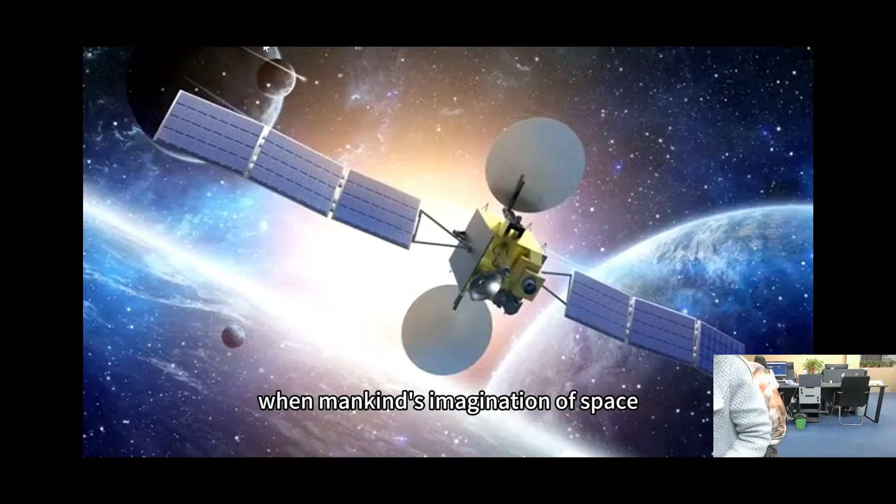When mankind's imagination of space breaks through the boundaries, when buildings are no longer bound by traditional structures, how to use the skeleton of steel to hold up the freedom up to 100 meters. From industrial factories to stadiums, from transportation hubs to cultural landmarks, LF has been deeply engaged in the field of steel structure and mesh frame for 30 years.

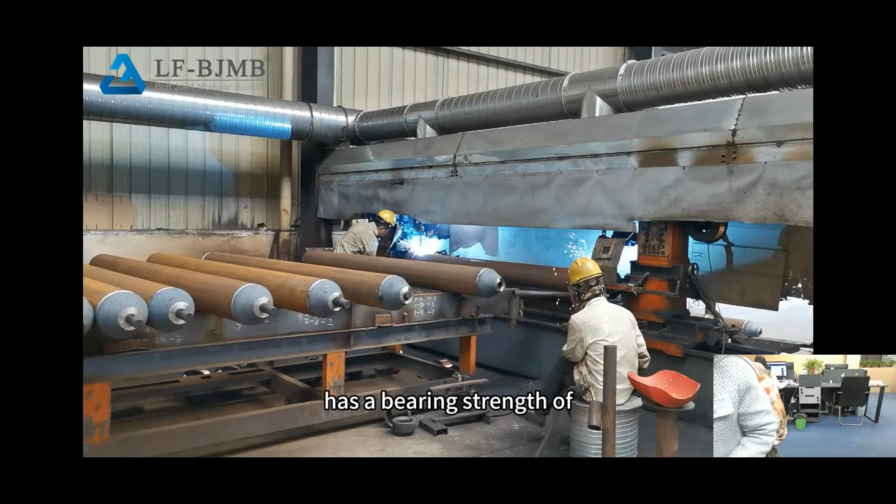We believe that true architectural innovation begins with thinking about the nature of space, removing redundant columns, and restructuring the balance of force and beauty with precise calculations. Each design proposal is a redefinition of extreme span. The self-developed LBX node system has a bearing strength of 1.8 times that of the traditional process, and the BIM full life cycle management system controls the material loss within 4.2%.

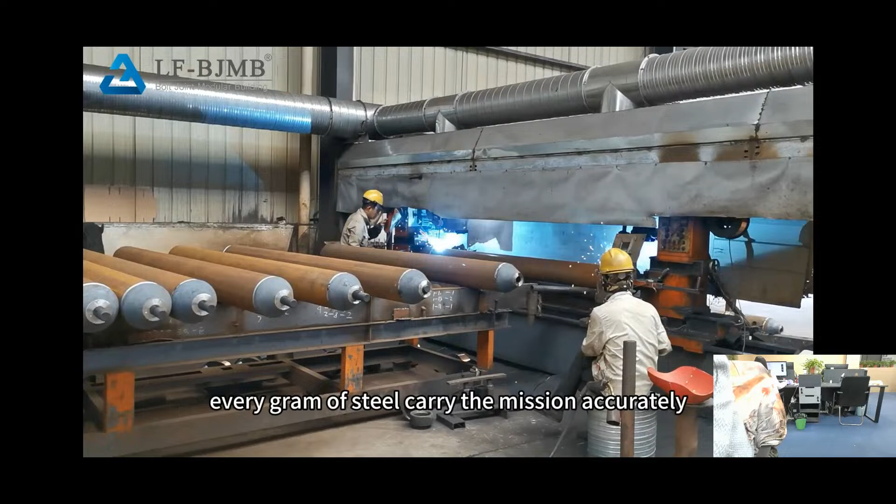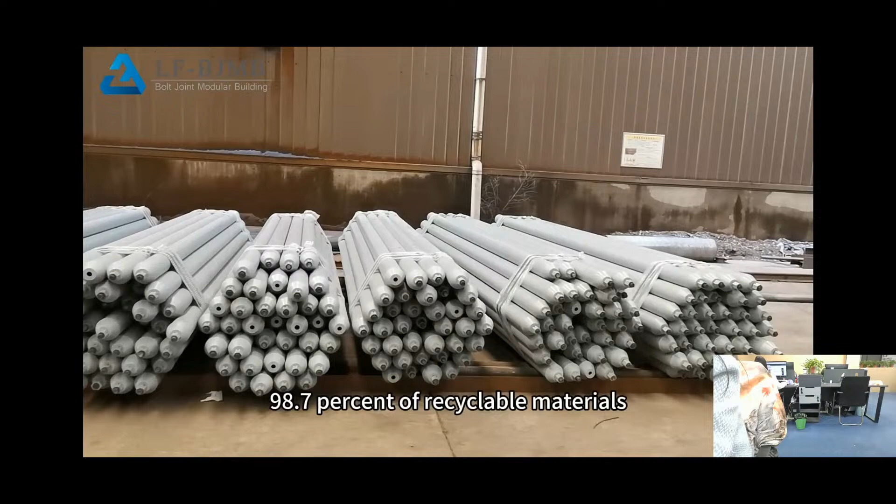This is not only cold parameters, but also our dedication to lean construction to make every gram of steel carry the mission accurately, and to make every curved surface imply structural rhythms. When sustainability becomes a necessity, LF's green formula is rewriting the rules of the industry. 98.7% of recyclable materials, 30% reduction in overall energy consumption, and 65 years of full life cycle design. We are proving that the toughness of steel and the gentleness of ecology can be symbiotic and co-prosperous.

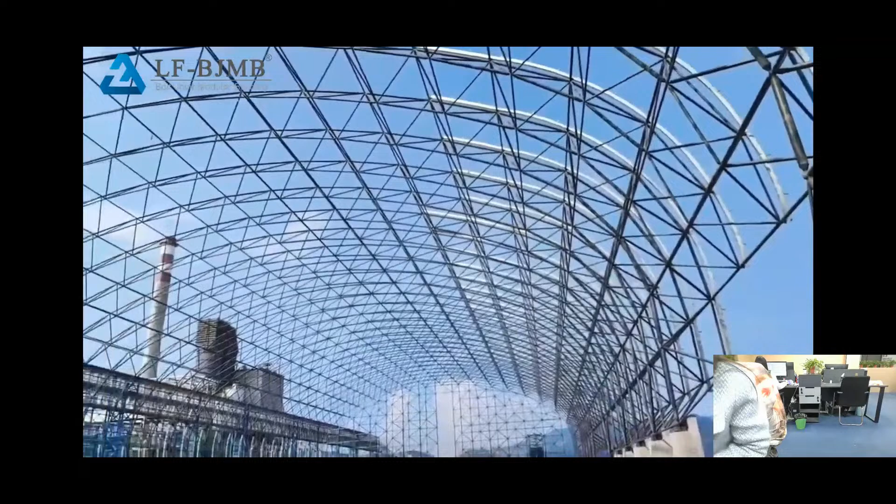From conceptualization to operation and maintenance, what we build is not a simple supplier relationship, but a value alliance across the whole life cycle of the building. 217 landmark projects around the world, an on-time delivery rate of 99.3%, and a lifelong traceable digital archive; behind these figures is LF's solemn commitment to architectural timelessness.

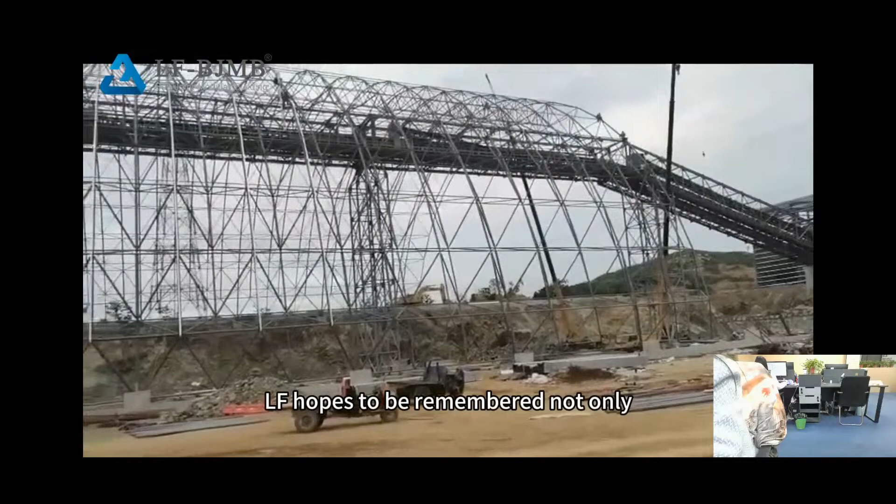When future architects look back on this era, LF hopes to be remembered not only for those record-breaking spans, but also for our consistent perseverance writing spatial poems with steel structures and pouring eternal promises with the spirit of innovation.

LF is especially professional on large-span space frame projects, such as coal storage, cement warehouse in barrel or dome shape, etc. Comparing with traditional H-type steel structure, space frame with large span has more advantages such as more stability, beautiful appearance, saving cost, etc. LF has been recognized internationally for its expertise in design and construction of space frame structure, domes, and freeform structures, with all products compliant with sustainable building requirements.

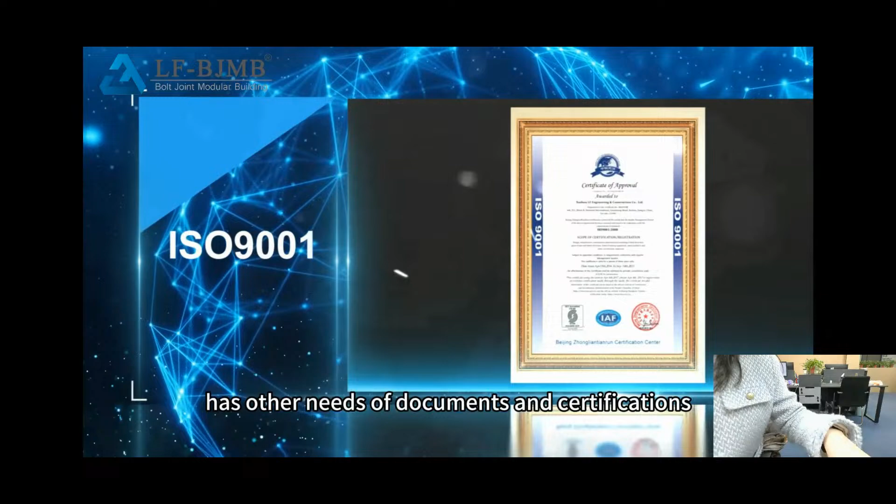Our products pass SGS, BV, TUV testing and certification, as well as SGS provided by the welding process in line with the AWS evaluation. If the customer has other needs of documents and certifications, our documentation staff will further implement the cooperation.

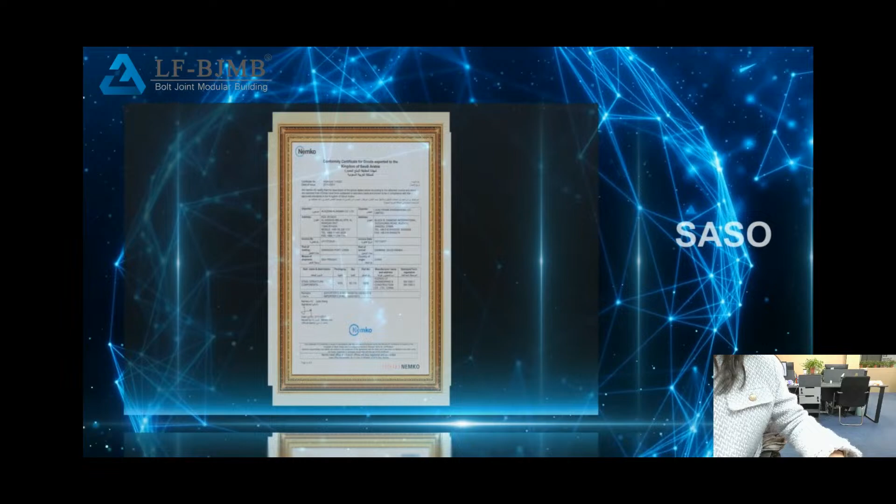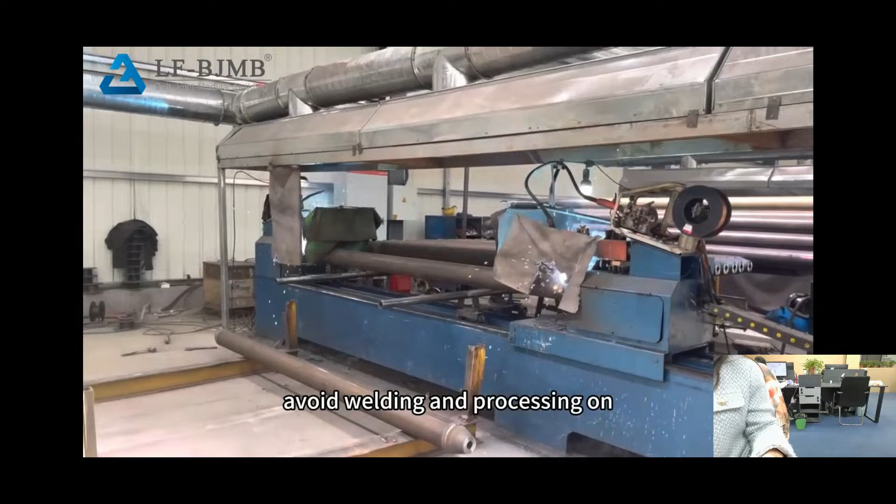All production is completed in the factory, and the components are miniaturized to facilitate transportation. Avoid welding and processing on site as much as possible. Most of our products adopt a small number of welding treatment methods. The installation period is shorter, and the requirements on workers are lower. Factory manufacturing can avoid the safety hazards of on-site welding.

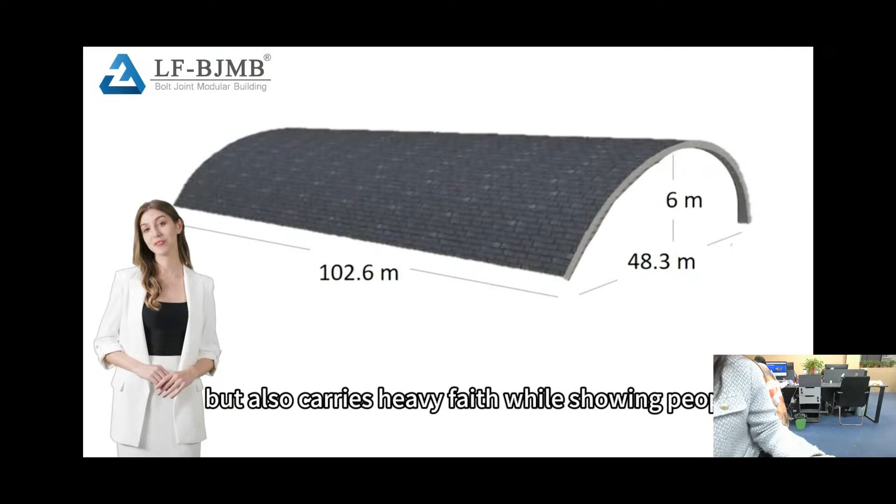Now let's take a look at the largest steel cathedral in the world, the Hand of God Cathedral in Nigeria. The steel structure gives the cathedral a strong and dynamic framework, as if injecting a steel spine into this sacred building. This structure not only demonstrates the mastery of modern construction technology but also carries heavy faith while showing people a balance of strength and beauty.

Application of space frame structure in glass dome skylight is reflected in its lightweight, efficient load-bearing capacity and aesthetic visual effect. As the dome skylight needs to cover a large area and bear a large load, the space frame structure can provide evenly distributed force transmission while reducing the weight of the overall structure.

Efficient load-bearing capacity, open space and flexible design make space frame structures widely used in hangars. The space frame structure has a superior spanning ability, which enables a large span of space in the hangar without interference from columns, and facilitates the parking, maintenance and operation of aircraft.

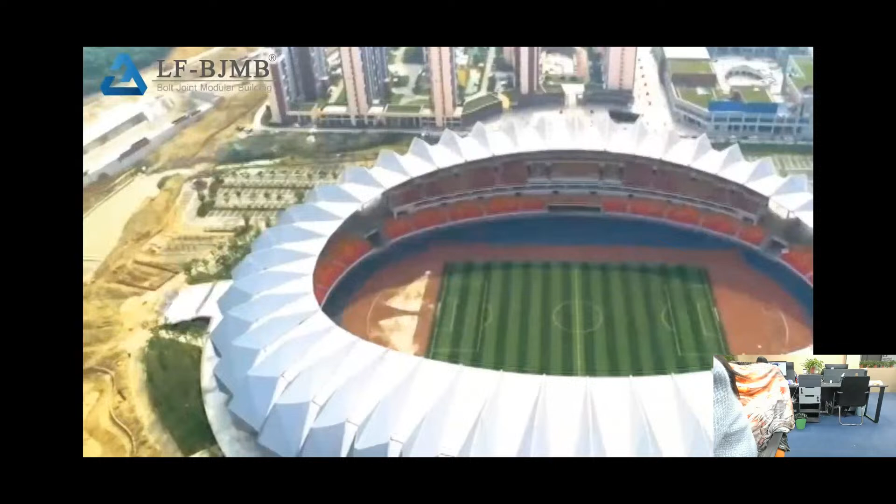Now let's take a look at Beijing Daxing Airport. The terminal of Beijing Daxing International Airport includes the main terminal, supporting service buildings and parking buildings, with a total construction scale of about 1.4 million square meters. The terminal covers an area of 780,000 square meters and has 100 boarding bridges. The terminal is shaped like a phoenix spreading its wings, presenting a unique shape of five-finger corridors.

The terminal is topped by a circular glass dome, 80 meters in diameter, surrounded by 8 huge C-shaped columns that hold up the entire terminal roof. These C-shaped columns are surrounded by bubble windows, which are mainly used for lighting and enable the terminal to withstand a Category 12 typhoon.

The roof of the central area uses a steel spaceframe structure, which is supported by 8 C-shaped columns, 12 groups of support tubes and curtain wall columns, forming a large span roof of 180,000 square meters. The C column is the main support structure, and its unique shape and arrangement effectively transfers loads, providing both vertical support and horizontal stiffness.

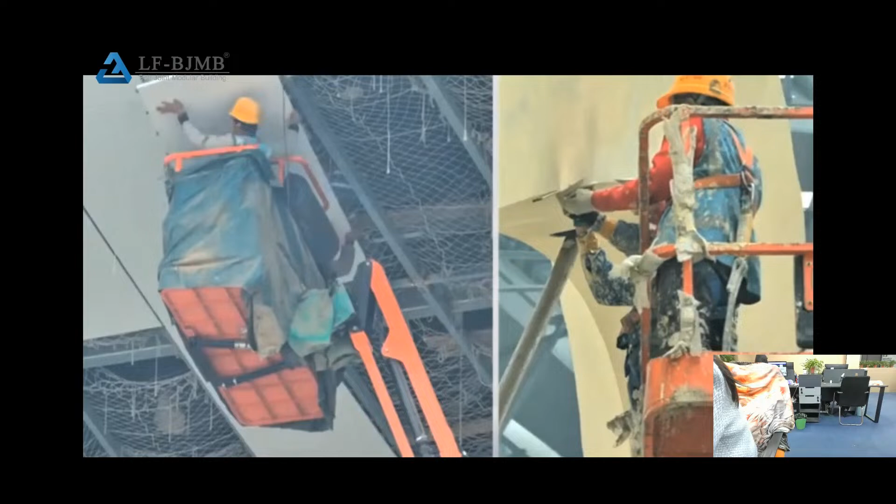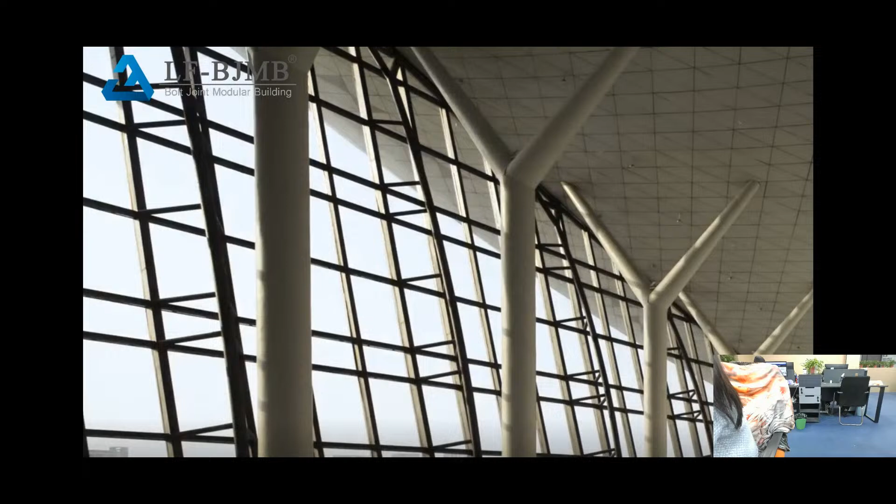Stepping into the museum is like traveling through multidimensional space. The well-arranged space layout is not only the ultimate pursuit of architectural aesthetics, but also a deep tribute to the history and culture of the exhibits. At every step, you can feel the integration of history and modernity.

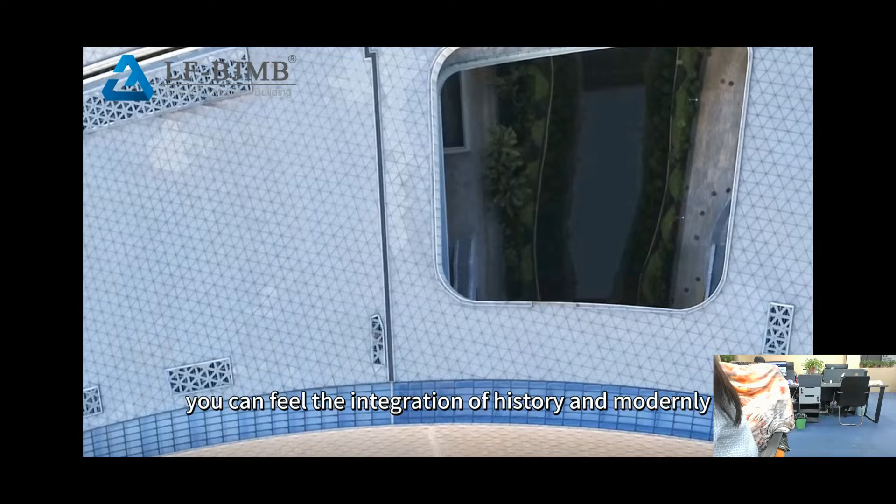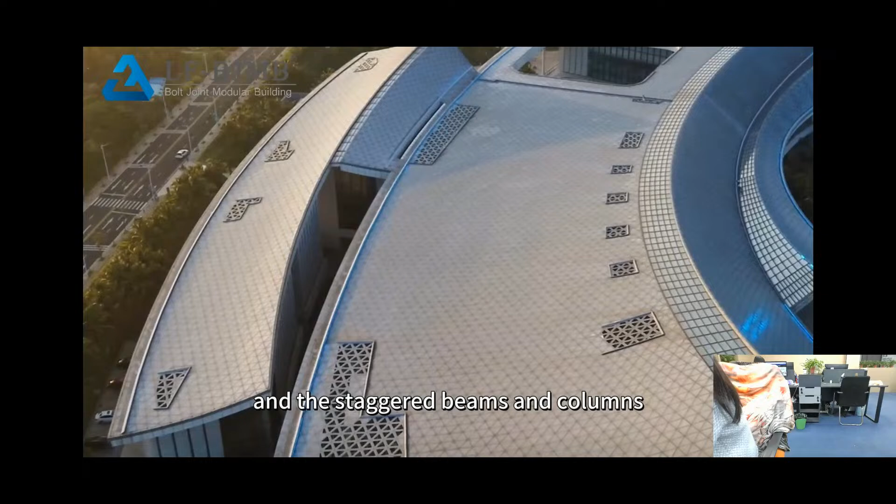The unique space frame design makes every corner of the museum full of surprises. The cantilever roof and the staggered beams and columns not only support the weight of the building, but also bear the crystallization of human wisdom. Every detail is a profound interpretation of architectural art.

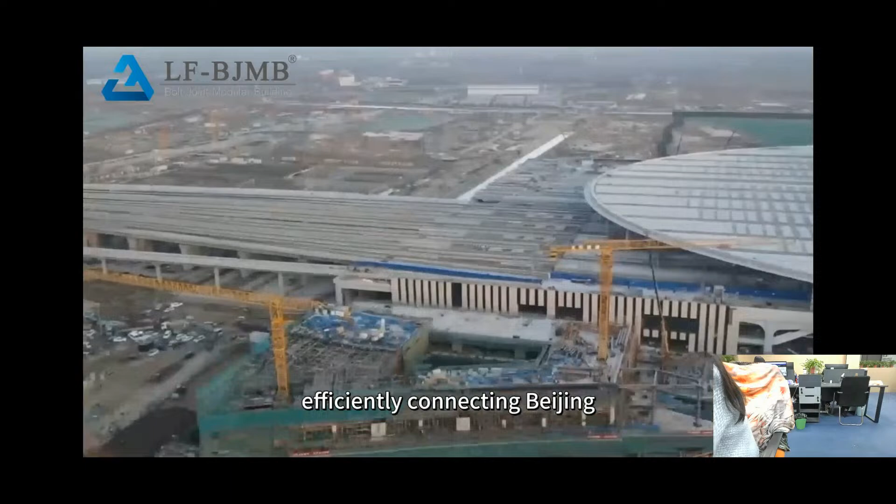Xiong'an High-Speed Railway Station is a comprehensive transportation hub integrating high-speed rail, intercity railway, subway, bus and other modes of transportation. In the video, it can be seen that the platform layers are scattered, and the high-speed train shuttles through them like a silver dragon, efficiently connecting Beijing, Tianjin and other parts of Hebei province, greatly shortening the time and space distance between the cities.

The supporting facilities in the station are perfect, from intelligent security check, face recognition, to automatic ticketing, information query. Every detail reflects the humanistic care of science and technology, which provides great convenience for passengers.

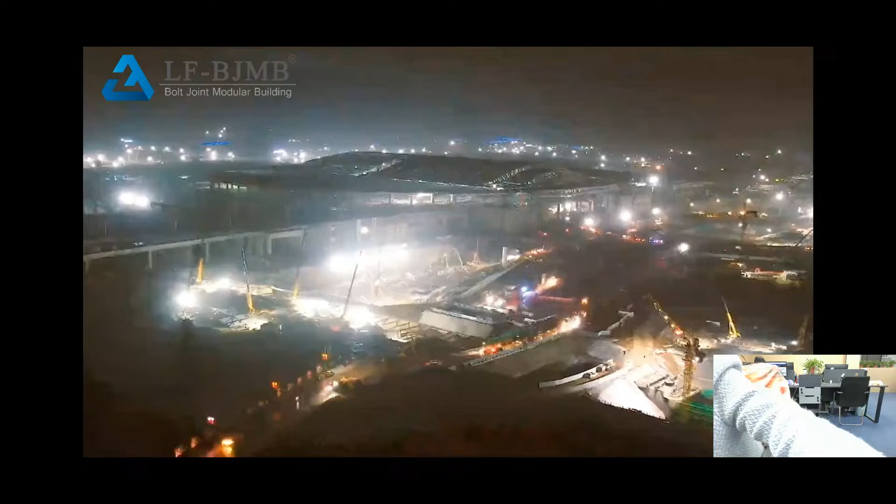The steel structure project of Xiong'an High-Speed Railway Station is a frame structure system with a total steel consumption which exceeds the total steel consumption of two Bird's Nest stadiums and is the leader in the steel structure consumption of large domestic transportation hubs.

Glass dome is usually made of tempered laminated glass, ultra-white glass and other high-strength, high-light transmittance materials with high transparency, good appearance, lightweight and other advantages. The glass dome is able to change with the skylight, bringing natural and soft light into the interior while reducing the use of indoor lighting and air conditioning, saving energy.

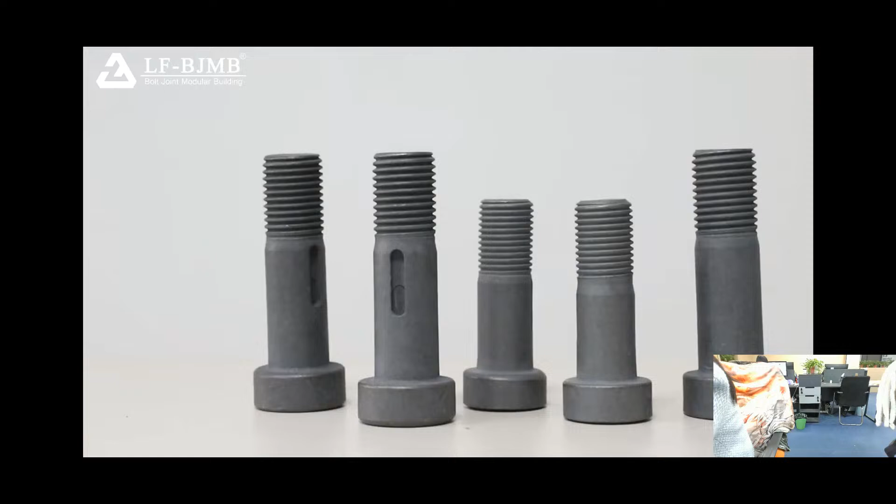Now let's look at some of the details. These are high-strength bolts. The role of high-strength bolts in the space frame structure is mainly reflected in the connection fastening and enhancing the overall stability.

These are sleeves. The sleeve is mainly used to connect the steel bar, which is to connect two or more steel bars through the sleeve to form an overall structure.

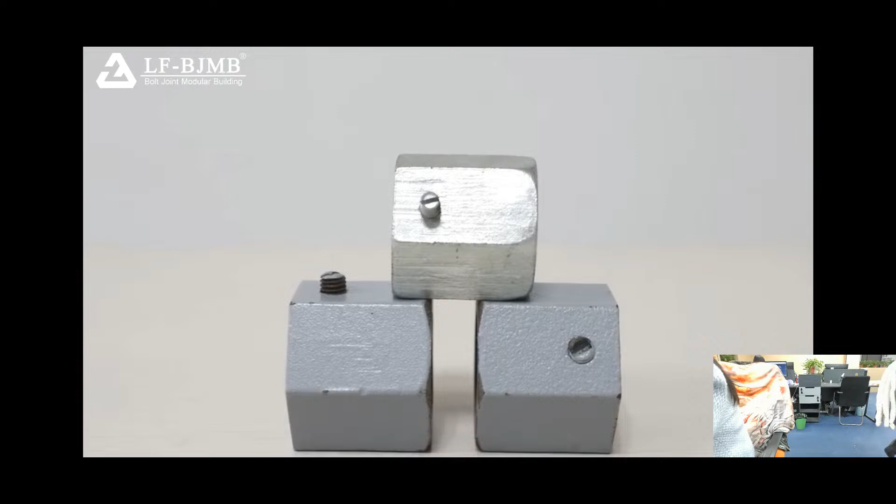LF spaceframe installation. Step 1. Preparation of spaceframe components. Step 2. Pull out high-strength bolt from steel pipe. Step 3. Install sleeve on high-strength bolt.

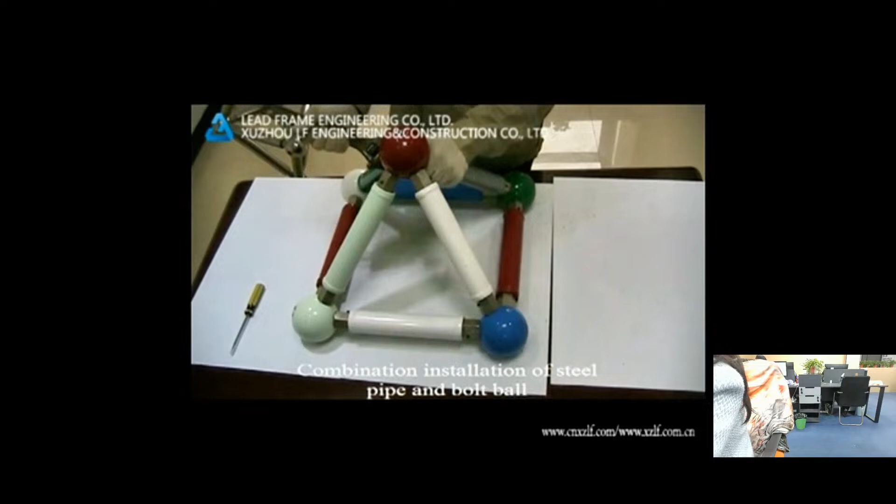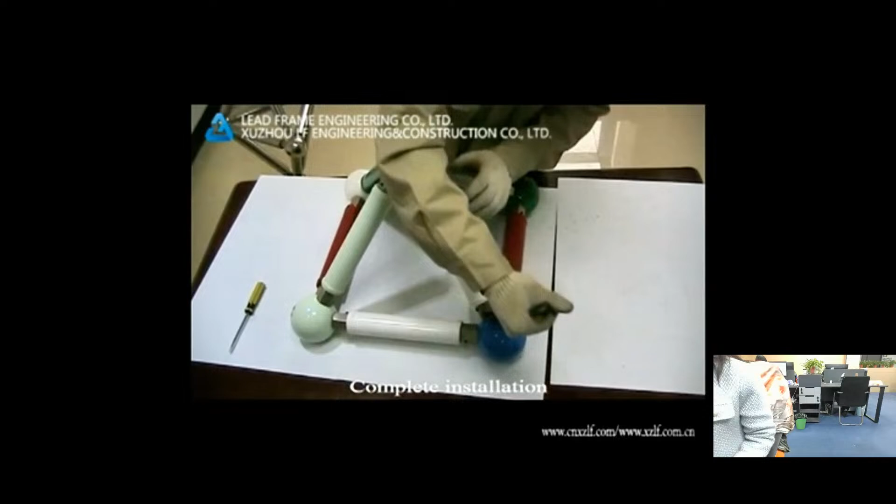Installation. This is a demonstration of the gas station shed roof installation process.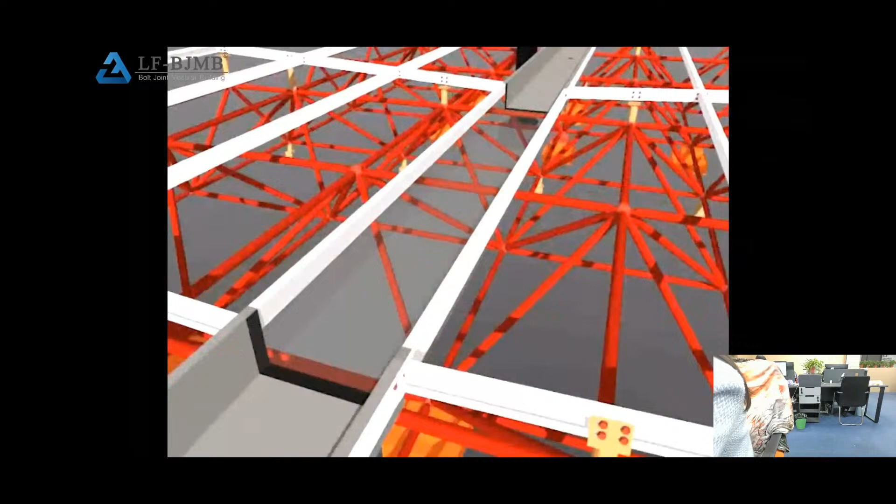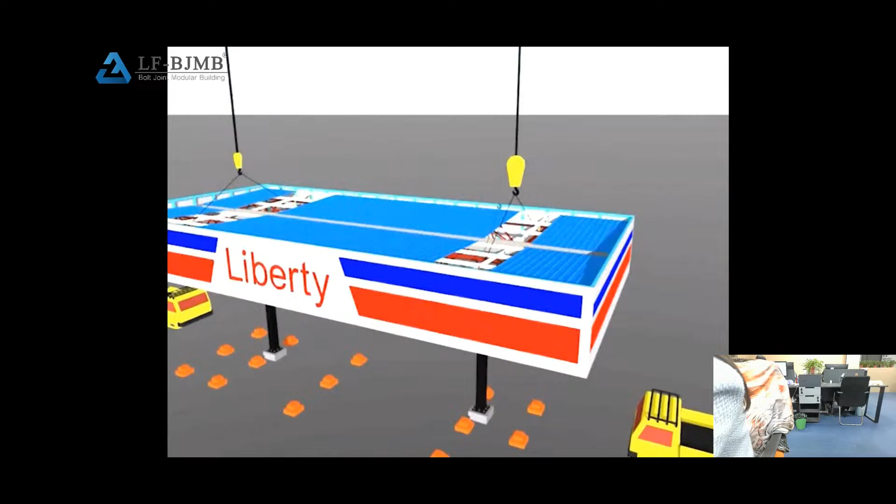A barrel shell is a shell with a barrel-shaped appearance or barrel-shaped structure. Shell is a kind of structural form with curved shape and thickness much smaller than other dimensions, which can bear large loads and has good stability.

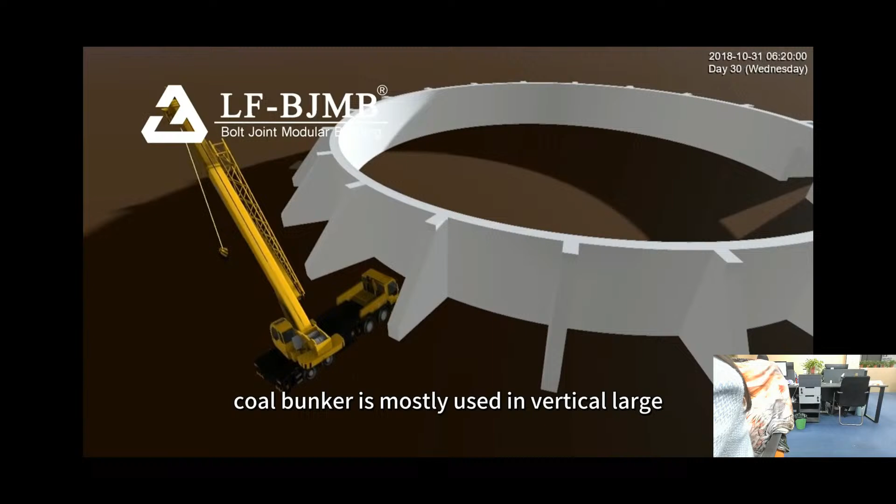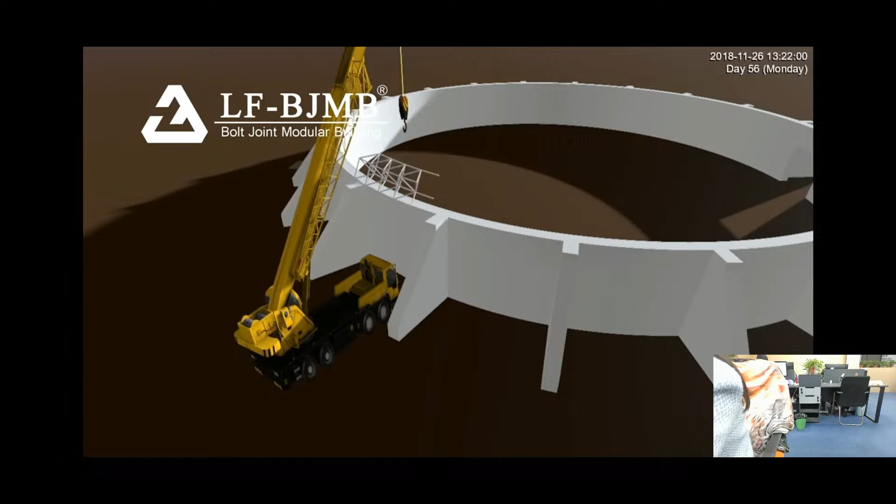This is the dome space frame structure coal bunker installation display. Dome coal bunker is mostly used in vertical large capacity coal bunker, and its structure can disperse the pressure evenly, so the stress performance is better. The design of dome coal bunker makes full use of its internal space, with high section utilization rate, which can store more coal. In addition, the construction of dome coal bunkers is relatively simple, and due to its structural characteristics, it is also easier to maintain.

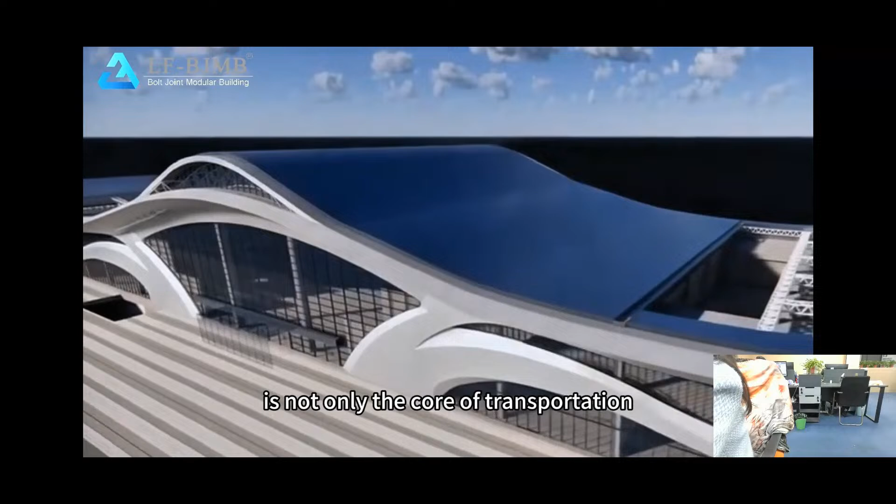High-speed railway station with grid structure is not only the core of transportation, but also a new name card for city development. From the exterior styling to the interior layout, the grid structure takes into account both functionality and aesthetics. The scientific mechanical design is wind and earthquake resistant and durable, providing a solid guard for the high-speed rail station.